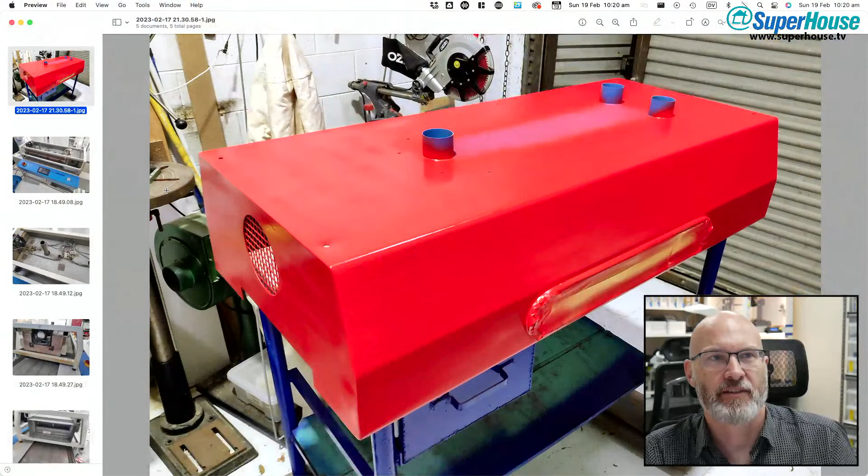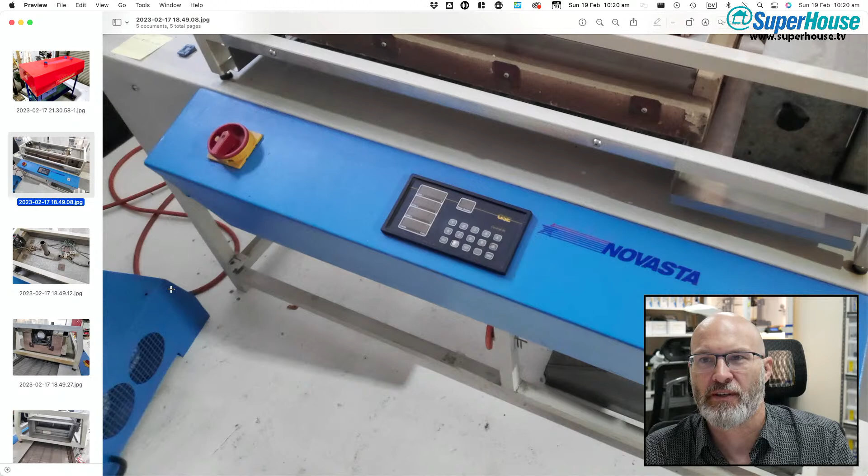So you might remember, if I go to this one, this is the reflow oven, the Novasta, which has its cover removed. The cover that was going over the top of this was the same powder blue sort of color. In fact, you can see it down in the corner, sitting on the floor, the end of the cover. This was after I had removed it, but before I had painted it. So that was the blue cover.

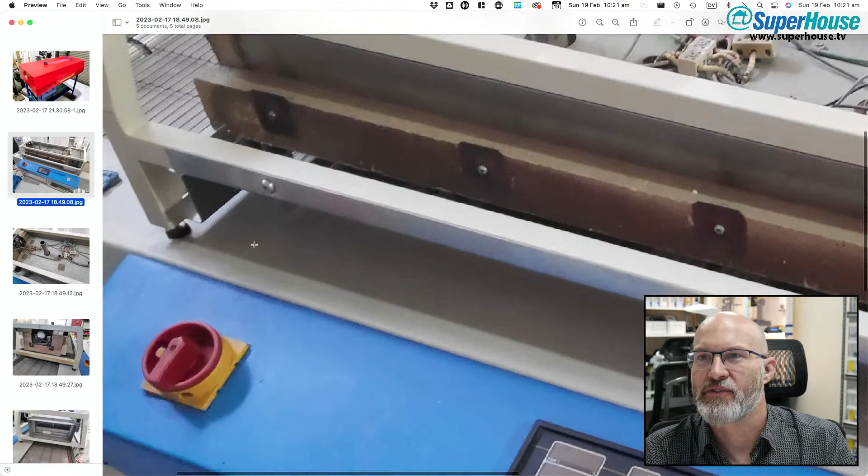Why is my track, I can't pinch to zoom, it's just moving. Oh, lack of focus, maybe that was it. So the cover sits over the top of this frame and then it bolts on with 4 bolts. I unbolted it, lifted it off, and the oven is all still sitting there.

Austin said looks like those fans need some filters. Yeah, there's a fan there that blows into just the chamber above it. This is the chamber above the reflow area, where the wiring and stuff is, so this is not actually part of the heated area. It's just a void above the heated area, with insulation sort of stuff like fire brick all around it. This fan I think is just to keep this chamber above it from getting too hot.

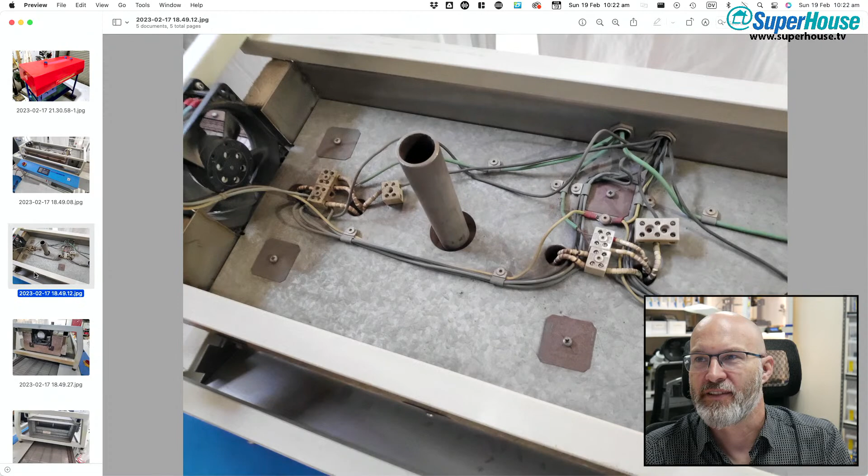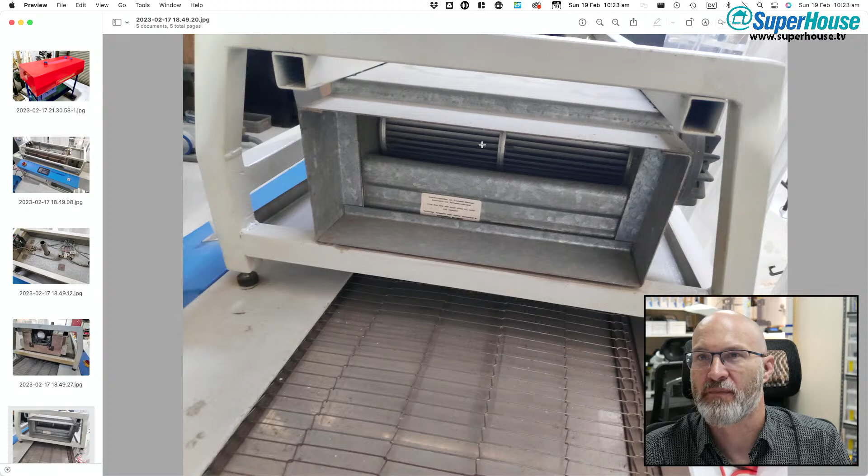Anyway, my point is, oh, and there's just another view down into it, a view from the end. This is the inlet side where PCBs come in underneath, and this is the outlet side where the cooling happens, you can see there's like a drum fan sort of thing there, that's part of the cooling stage.

Anyway, I took the cover off, I painted it red because red seems to be an appropriate color for a reflow oven. I hope you agree. I don't think I've got a photo.

Oh, hang on, maybe I do have a photo of it, an older photo. If I go back in my photos here, maybe there might be, come on, where is it, trying to find a photo of the reflow oven overall. Oh yeah, here we go.

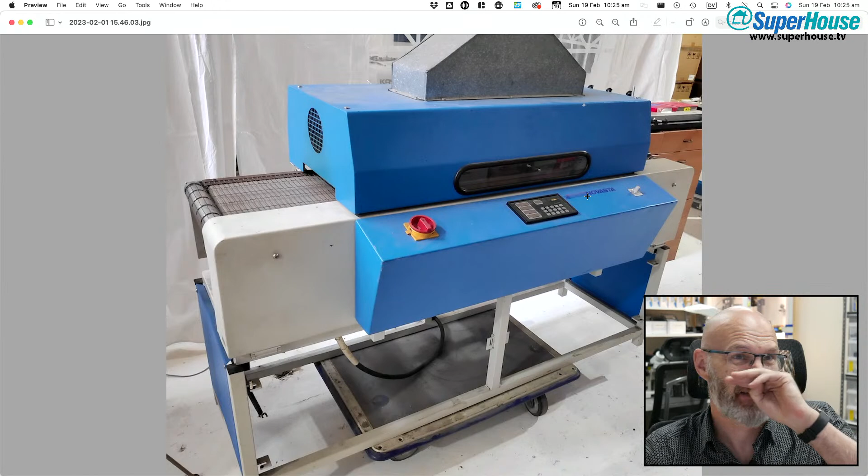So it's got the Novasta logo on it, but Novasta doesn't seem particularly interested. They'd be kind of curious to see it in action, maybe. I've had a couple of emails from them, but they don't really seem to care.

The fact that this is an oven that seems to have been built within the first year of when their company was founded, maybe the second year - so this is one of the first ovens they ever built, and it's now functional again - they don't care. I thought they'd be very interested to see it.

But anyway, my interest in keeping the Novasta brand has disappeared, and I want to put a fun brand on it. Maybe a...

Someone suggested having Steve in the logo, so I thought of maybe Steve holding a cigarette lighter, or Steve holding a match. I was talking to Andy about it last night, and he said if I set up some kind of online monitoring system for it, connected to the internet - not for control, just for monitoring - I could call it the World Wide Webber, which I thought was very funny.

Austin says we have a silkscreen logo, Steve, that would work. Yeah, Steve brand reflow ovens.

So the first thing I thought of was just to call it the Bernie Boy, or maybe Toasty McToastface. I don't know, there's got to be all sorts of joke names.

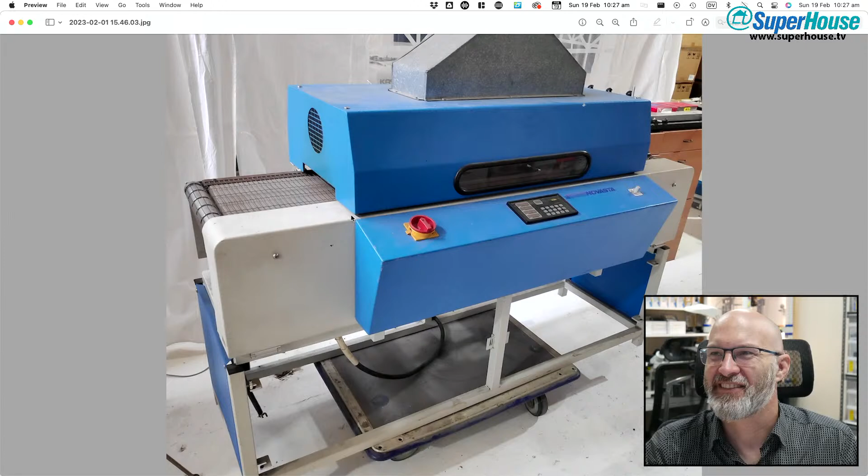Anyway, that's your job - everyone here, contribute. You need to come up with some ideas for what to call this thing.

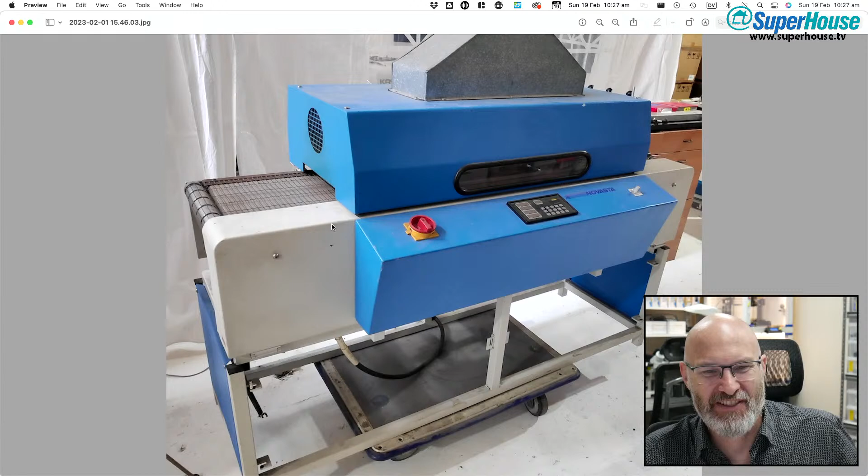Yeah, superstar. Imogen says, oh my god, there are so many good options. Okay, well - oh Michael, I love this one: Gloria Steve Reflow Oven Manufacturing Concern.

That's brilliant. Hang on, I'm going to open Evernote because I think I'm going to be taking some notes along here. Reflow blaster, and Steve with a flamethrower.

Okay, new note. I've just got to copy and paste some of this - reflow blaster, instead of reflow master. Michael says Mr. Sparkle. Yes, Mr. Sparkle.

PCB Barbie, says Aaron. I am copying these in - got to delete that. Delete. Sorry, I'm copying these for future reference.

Can we call it Hot Steve? Super Barbie. What did Gerald say, where was Gerald's comment? Yes, reflow blaster and Steve with a flamethrower - but I liked Michael's one.

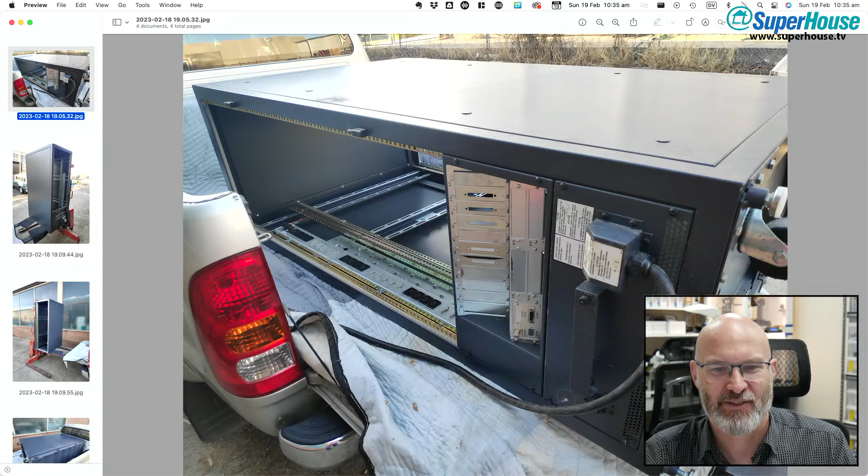Yeah, terrible. Measure twice, burn once. The reflow oven suggestions are still coming in. Thanks, Imogen. I'm adding that one to my list.

Okay, running at 1.5 to catch up. So if I speak really, really quickly, everybody who is running on accelerated to catch up will have trouble following what I'm saying.

So this is a part of computing history. Backing up just a fraction, this is touching on the clean room construction. One of the major considerations I have with constructing a clean room is the overall ceiling height in the factory, since the roof is on a bit of a slope. The high part is on the south side of the building, the low part is on the north side. The roof slopes down, and the clean room is on the north half of my part of the factory, where the roof is slightly lower, about 4.2 meters, give or take. I want to have enough room above the clean room for a mezzanine for storage, which will give me a huge amount of extra space.

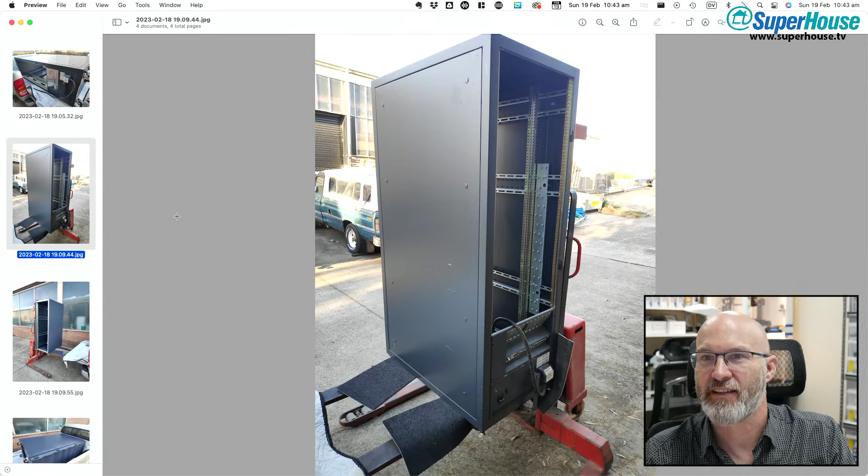So this is, I think, a 36 unit rack. This is it standing upright on the forklift when I was unloading it yesterday. This was before I got it on the forklift—going back in time—this was it sitting on the back of the car. You can see the wavy front on it here; the whole front of the rack is shaped like a wave. It looks really cool, and it is ridiculously heavy. This is probably one of the heaviest racks I've ever seen. The construction—that door alone probably weighs nearly as much as some racks on their own. A lightweight rack wouldn't weigh much more than this door. It is super heavy, and you can feel it—this is on the back of a Hilux—you can feel it driving down the road. There is a lot of weight in that.

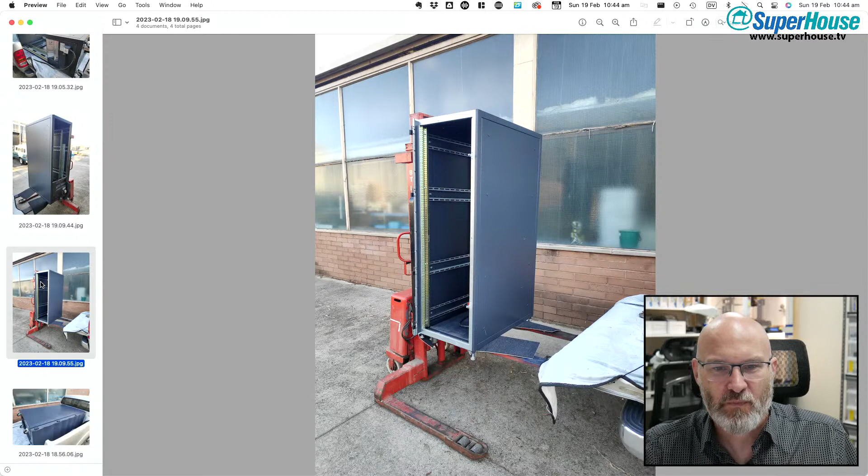Gerald said, yeah, that's right. Emily Velasco has stickers that say 'Big Wet Meat Sack' to stick on the electrical panel. Yeah, I should get some of Emily's stickers—I'm adding a note to myself. Thanks, Gerald, for reminding me. I'll see what else Emily has available too.

Right now, this rack was previously part of—yes, Stephen, that's another good one: 'This machine will kill you and it will hurt the entire time you are dying.' Yeah, I love those funny safety signs. Back to the story. Stop waving shiny things in front of me, my squirrel brain will chase them.

This rack was originally part of a Cray supercomputer used at the Department of Defense. Andy told me the serial number on it—Cray number 105, I think he said. I'll have to find out which model of Cray it was, get some details from him, and maybe make a little historical note to stick on it. So in any case, this chassis was originally part of a Department of Defense Cray supercomputer—it's a piece of computing history, really cool to have. Yes, someone says it's a museum piece. It is.

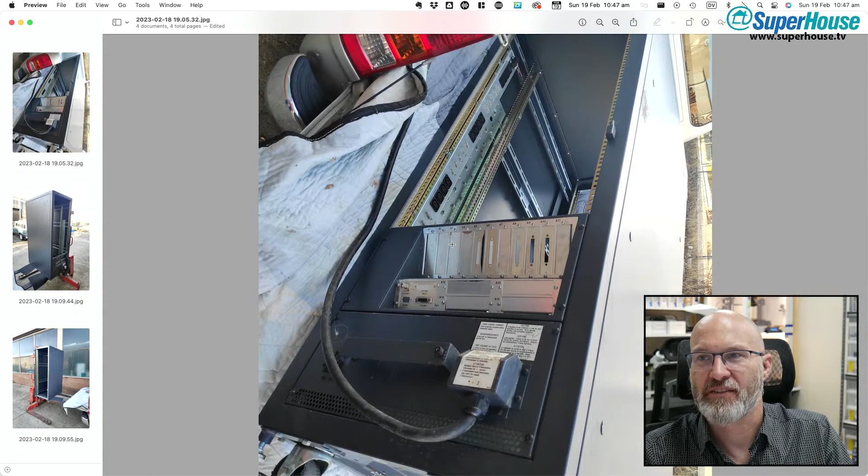So in the bottom of the rack, in fact if we have a look at this photo, you can see there it's got — these are earthing tie-down points, I think, on the right, this big bar that goes up here. So power into the back of the rack here, and then all of the power management and interface stuff here. And then the rack would have been filled with whatever it is that makes a Cray supercomputer.

Potentially serial sockets connected to relays to turn individual sockets on and off, Michael said.

Potentially, yeah. I got this here last night and unloaded it, so it's currently sitting in the back of the factory. It's on huge casters, so it's really easy to move around, got really big wheels on the bottom. In fact you can see them in this view here. Very, very heavy duty, and then adjustable feet, obviously, to lift it off the wheels and sit it properly in place on the floor.

So, but I haven't investigated at all, so I don't know how any of this is connected, or where this power cable goes, or what's inside here. There was a 5 volt 30 amp voltage regulator board that Andy had, but that may or may not have come out of this.

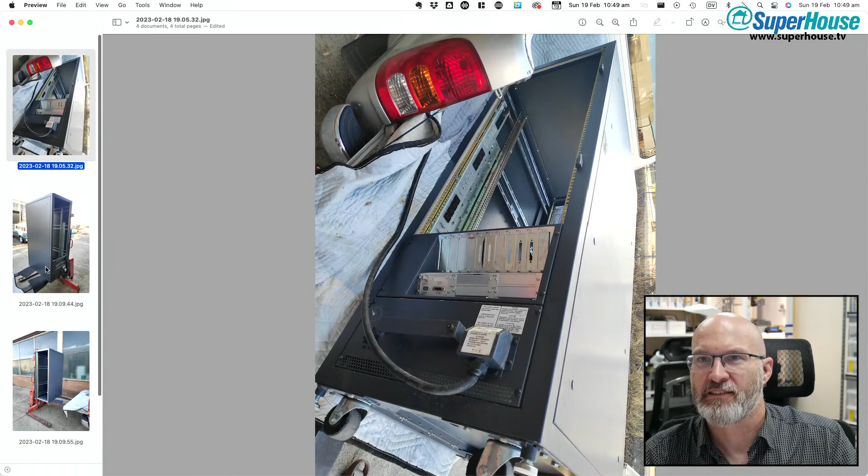So that is the story of the Cray supercomputer rack, which is going to go into the clean room in the location of the current rack. And what this will allow, because this is significantly shorter than the current rack, is it will give me total flexibility in setting the ceiling height wherever I want it.

Scott says, pretty sure cable tie is a thing for bicycle wheels, yeah. Is cable tie here? I think cable tie is probably out on his bike right now. He's probably up on Mount Dandenong, is my guess, because it is a beautiful day here in Melbourne, and it doesn't seem to matter what the weather is — cable tie likes being out on his bike, going for a punt up the hill and then a rocket ship descent back down again.

Now, what was I getting to? Oh yes, okay, next thing I'm going to try launching.

Michael said, just about all server racks on Navy ships everywhere in the world are made by a little company up near Buffalo, New York. You're not allowed to use anything else.

Interesting. What am I doing? That's right, launching Fusion 360. So that'll take a while — I press the button, but Fusion, it takes so long to load.

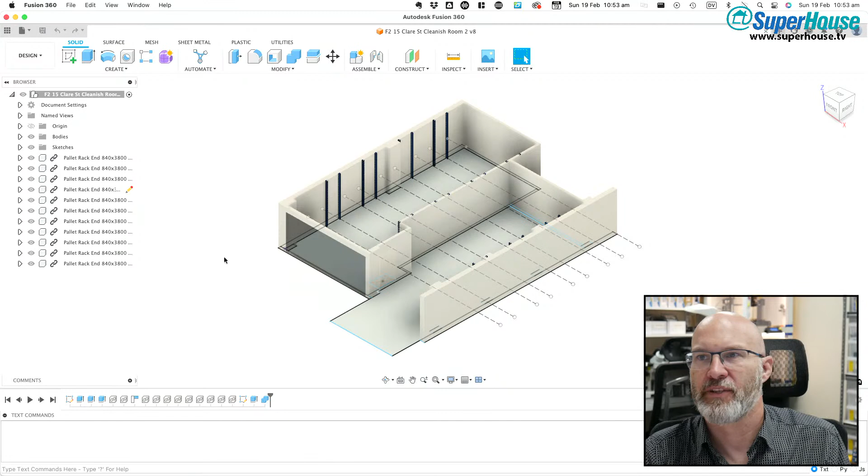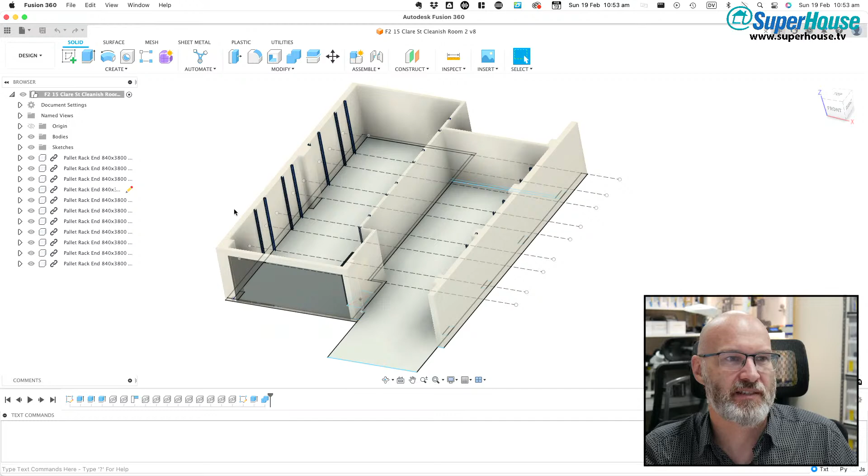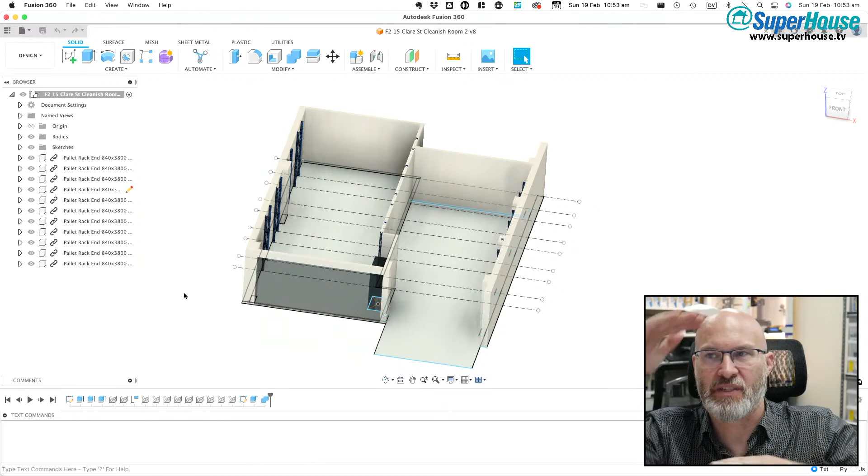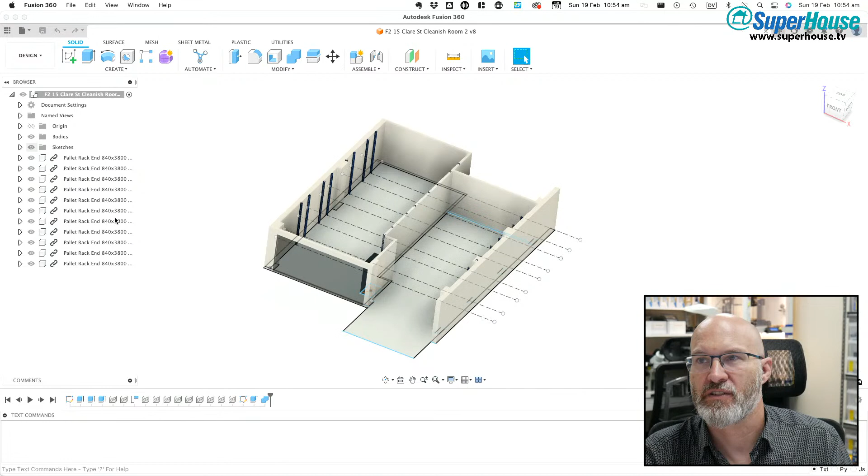Very quick reiteration: build simple walls, etc., which is a reasonably straightforward way of doing it. The main issue is the cost of the beams required to get the span across the clean room, because the clean room is quite wide - about 5.2 meters from the wall to the division down the middle, or about 5.1, something like that. Running joists across here, like LVL beams or whatever, the depth of the beams is significant, the number of beams you need is significant, and then the cost becomes significant. So doing it as regular timber walls with LVL beams across it in order to have a mezzanine above it becomes quite expensive. Hang on, I'm just going to turn off sketches and I'll give you some explanation of what you're looking at in just a moment.

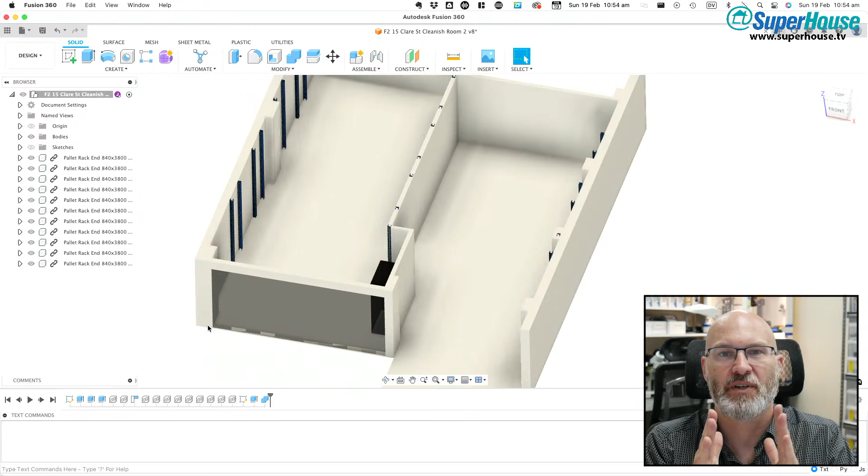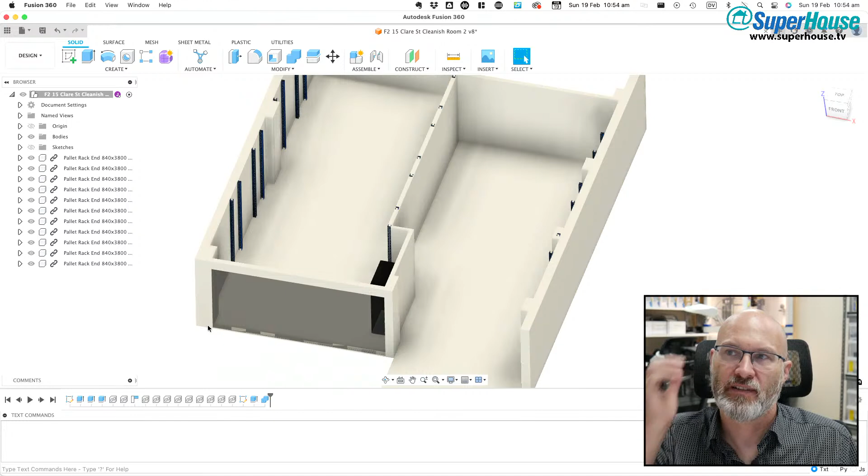So then, of course, I was talking about using cool room panels, and that is an interesting option, but there are some issues. One is insurance. These days, cool room panels, which are foam sandwich with Colorbond steel on both faces, are becoming an insurance problem because they can be a fire hazard, which means you need special fire retardant cool room panels, and they cost significantly more. And then the issue, once again, is the span. Using cool room panels as a combination of structural material and final finish has some issues, and it also ends up being reasonably expensive by the time I do a thing this big.

Mr. Fixit says use metal studs, easy to run cable. Yep.

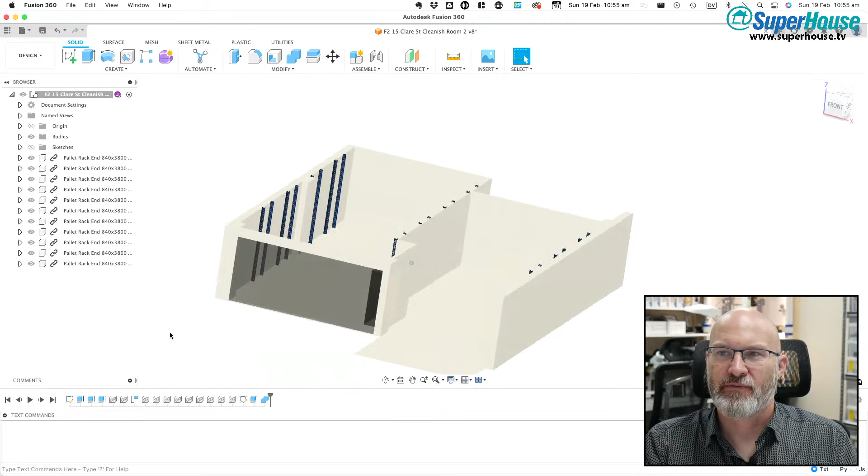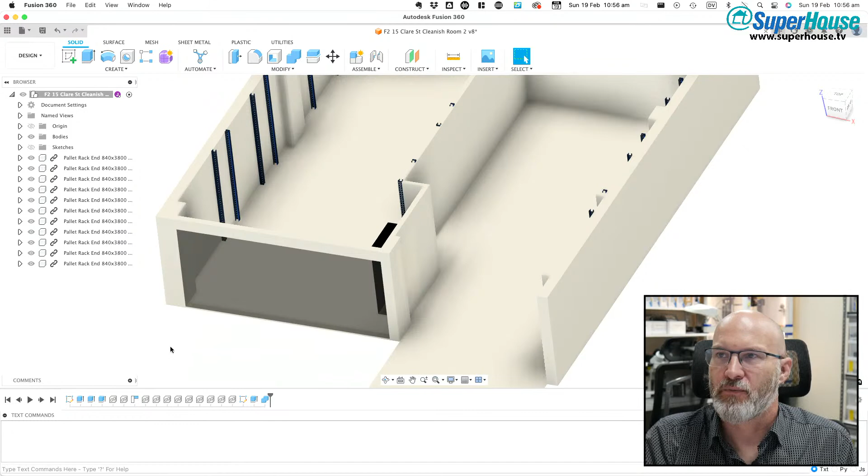So, sorry, I was just skipping back through chat. All right, I will try to stay focused. Anyway, in recent times, Lachlan has fallen in love with Dexion pallet racking, and a couple of weeks ago, Ben, one of the guys from Melbourne Eastern Suburbs Hackers, was clearing out his factory just down the road in Boronia, getting rid of a heap of Dexion pallet racking. Lachlan and I went down to have a look at it, negotiated a purchase on the spot, and Lachlan just bought the whole thing. What Ben was getting rid of was pallet racking and a mezzanine, so Lachlan is using that material to build a mezzanine out in the back part of the factory, in his area. It really got us talking about using Dexion pallet racking as a structural material to build the basic structure and then simply clad it. So what this model is about is using pallet racking.

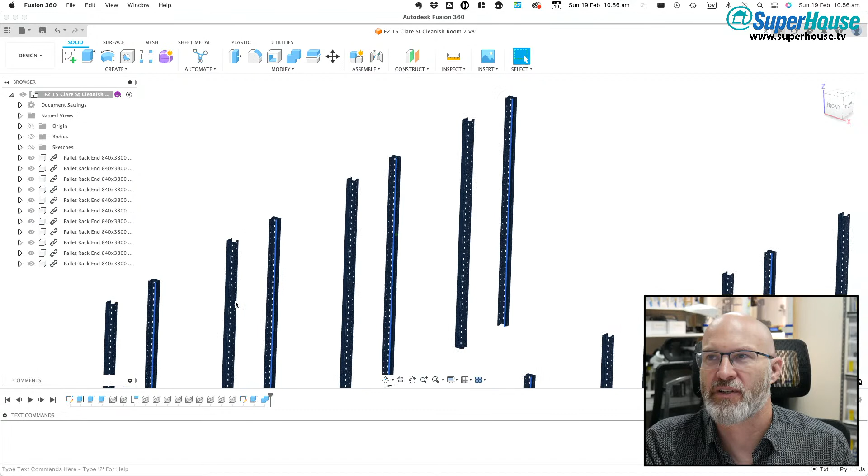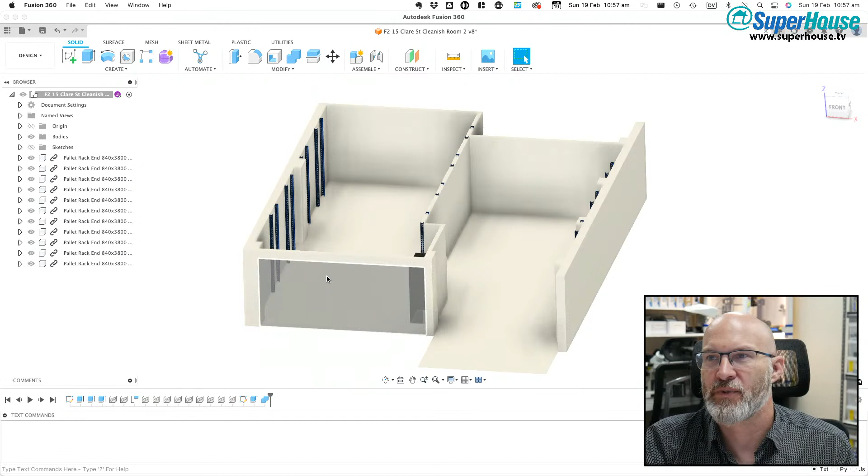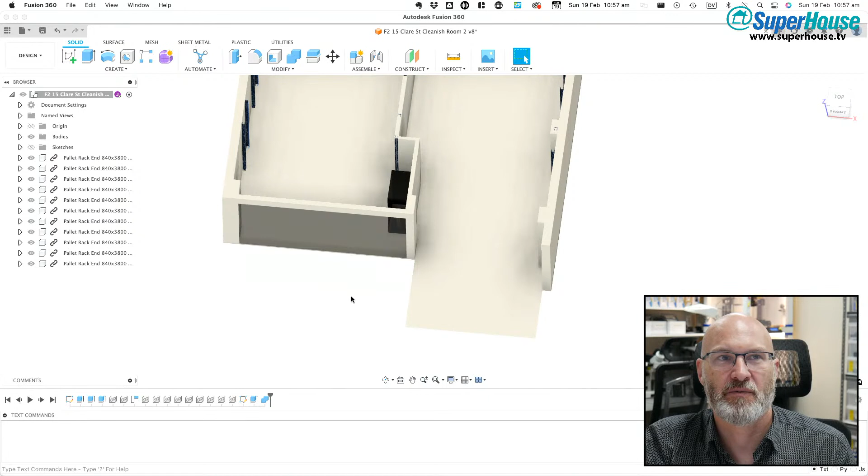Now if I turn off that one - yes. So what you can see here, this is a very poor model, just to show basically where it goes. Each pair of these is a set of uprights, and then there would be beams across as well. The beams aren't in this particular model, but if I turn back on the main area - this area at the front here is the big glass wall, just to my left, where all the big glass sliding doors are. In there you can see the location of the server rack. Part of this thicker stub here is the existing cement block wall - the wall actually comes forward from there as well, but I haven't included that in the model. This white area where I'm spinning the cursor around is my front lab area, where I'm sitting right now, and this area here is the loading dock, where I've got workbenches and things.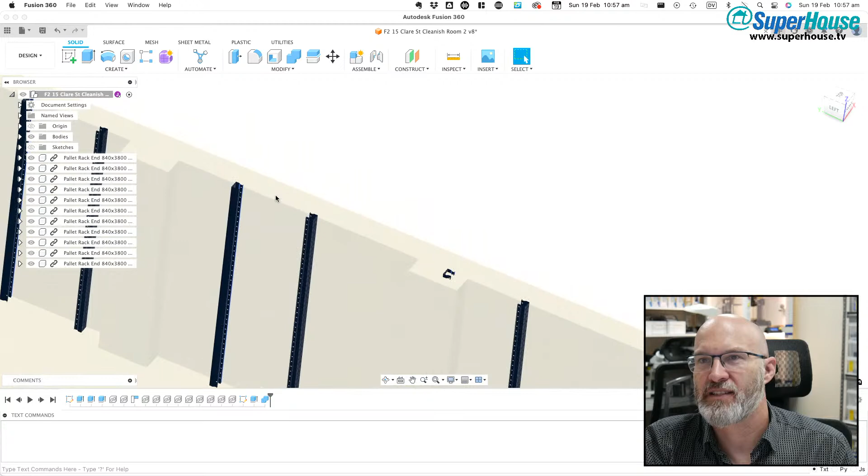I haven't bothered with the model because that's not the point of this. I was just doing this to figure out where I could put things. The major issue is these buttresses in the wall of the factory. It's a cement block wall, but periodically it has these buttresses sticking out, and I was trying to work out where I could fit the uprights.

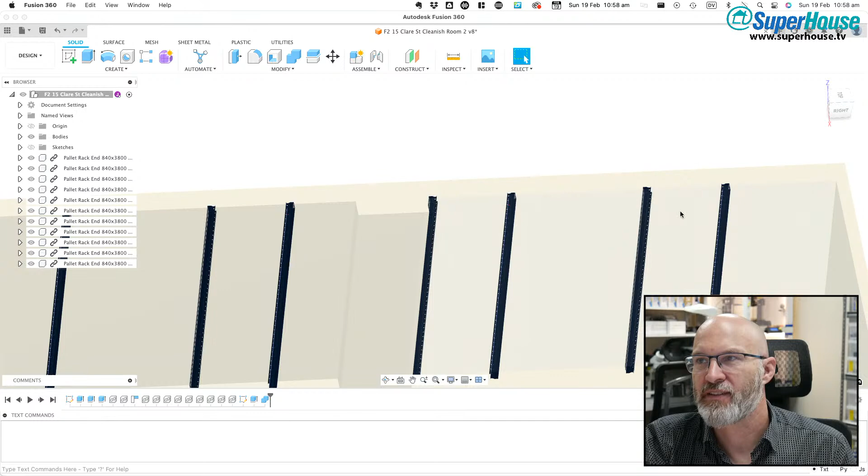For the pallet racking that would clear the buttresses and keep all the spacing as it needed to be. So this is the current plan. Use these pallet racking uprights, which will actually go up to here somewhere. They don't stop at this point. This is just, once again, for positioning purposes.

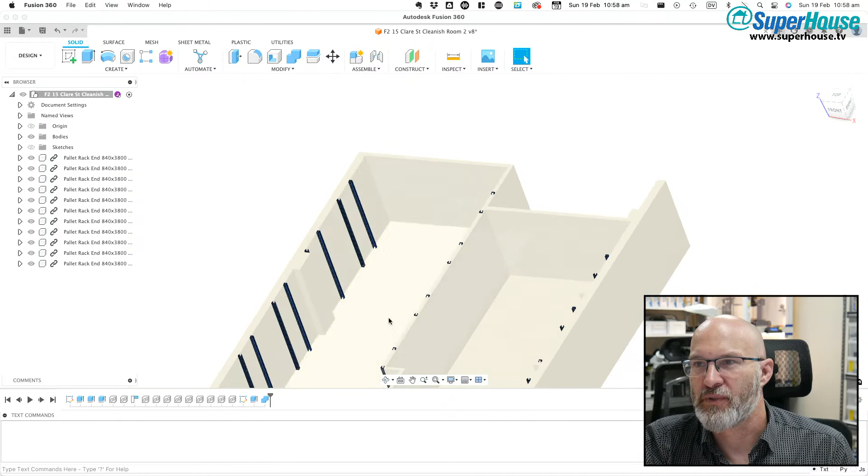They will go all the way up to here somewhere. I know this probably looks weird because I've got the camera in orthographic view. Let's go for perspective view. Now it'll look a little bit more realistic and probably stop messing with your mind as much.

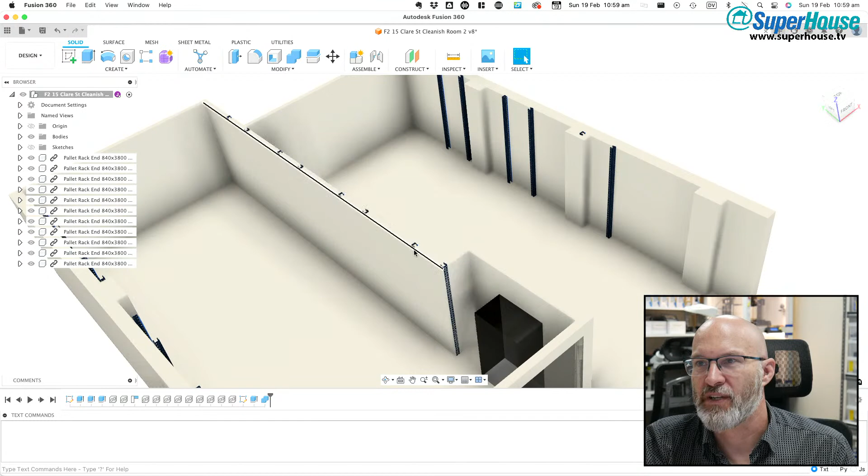Now you can see here in the middle of the room, just poking up at the top there, is the top of pairs of the uprights of the pallet racking. So the idea is that this would be built by assembling the structure, and then I've got 4.2 meter beams.

to go across here. So the beams haven't arrived yet, but I've bought them. They're being shipped from Sydney, and they're basically the longest beams you can possibly get that are Dexian compatible without going into totally ridiculous custom made stuff. So they're not exactly 4.2 meters—they're like 4,217 millimeters or something in length.

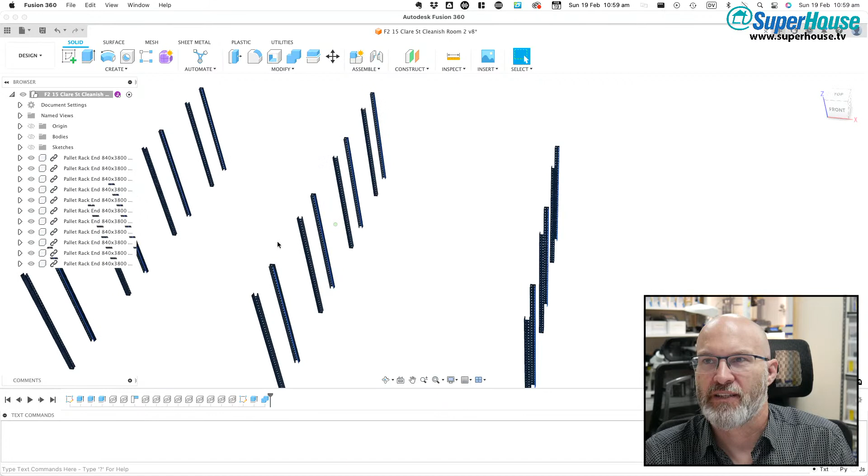So there would be Dexian beams going across here. The plan is to build the skeleton out of the Dexian pallet racking, and then line it with plasterboard so that from the inside it'll just look like a regular plaster wall. It'll be a nice smooth wall, and the same on this side as well—the whole thing will be plasterboard lined.

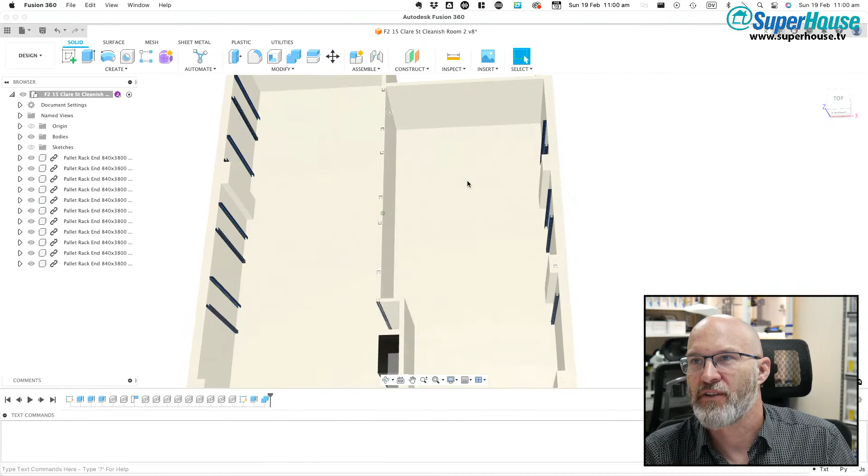Now you'll also notice this area at the back where this thing comes up here. At the moment, the back of my area is represented by this wall. My packing bench is down here, and all my storage shelves and things are along here. The reflow oven is currently sitting right about here, and the pick and place machines are in here.

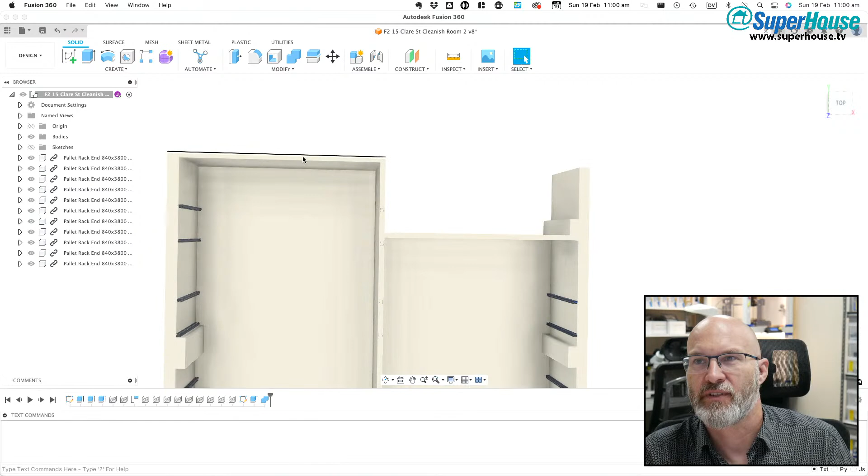But I've been discussing with Lachlan taking some more space at the back of the factory. So the current plan is that my clean-ish room, which currently ends about here, is going to push back another couple of meters into his area, and then he's going to have a pallet rack on this side. So this dividing wall is going to be on the back of a pallet rack that he will have—just a divider between the two areas.

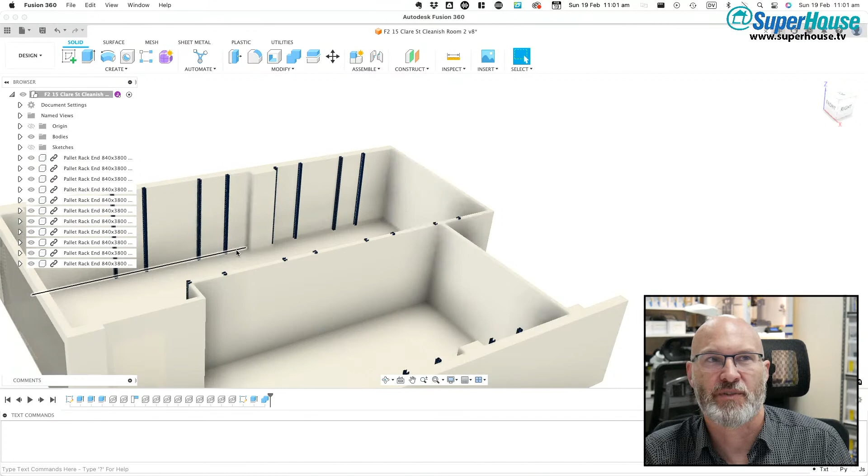And then there'll be beams across, say from here across to here—lots of beams running across, forming the ceiling of the clean room. And then there'll be purlins that run across the tops of those, running lengthwise, and floor sheeting on top of that, forming the structure.

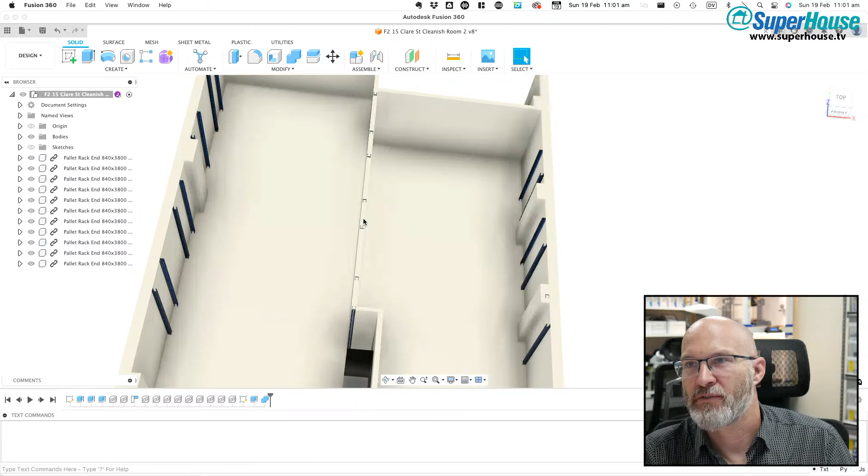The interesting thing is that with the 4.2 meter beams, you can see these uprights are against the wall and inset within the buttresses. Then we have a row of pallet racking uprights in the dead center of the factory, and another row against this wall in between the buttresses. With the 4.2 meter beams, that span fits perfectly.

So what this means is I'm actually going to end up with a mezzanine area on the right hand side as well, so I'm going to gain a huge amount of floor space. Yeah, a little bit hard to represent like this.

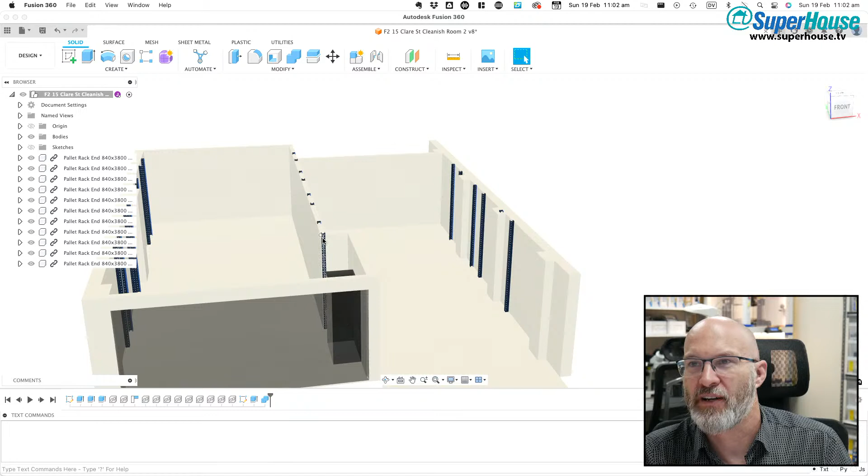You can see that I'm doglegging the wall around the server rack, so the server rack will be visible through the glass wall, but then the wall will scooch around behind it and head straight down here. That dividing wall will be in the exact center of the factory, instead of being offset, which was my original plan.

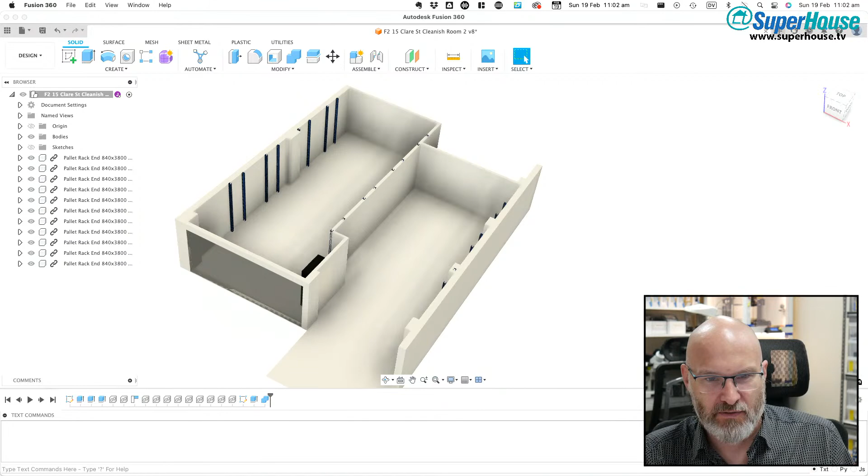Use metal studs, it's easier on cable. Andrew says he uses Dexion and it's awesome. Yes, and Michael says Dexion stuff is definitely A+.

Stephen says leave the start open where the big roller door is, so you can forklift things up to the mezzanine by opening the door. Scott says be very careful and do the calculations of load bearing ability in the middle of the mezzanine floor. Yes, that is important. The Dexion beams come with load ratings, which is very helpful, but because this is a large span, you're right, it's the middle part of the span that will be under the most stress, so I need to be careful about all the load ratings.

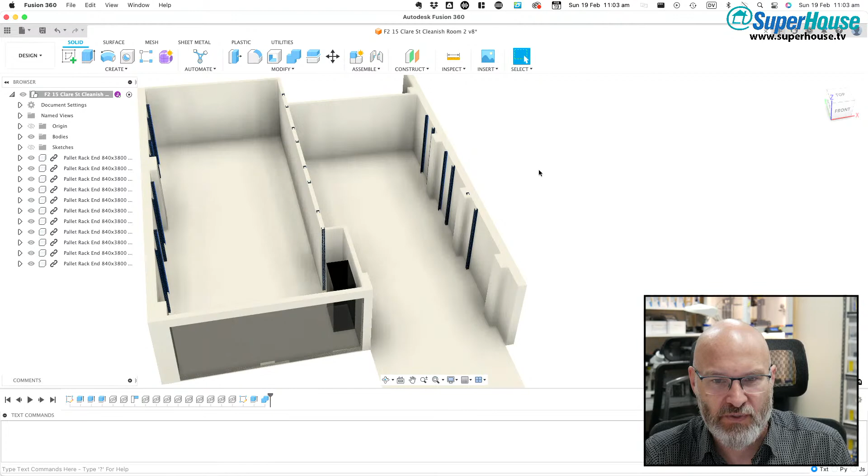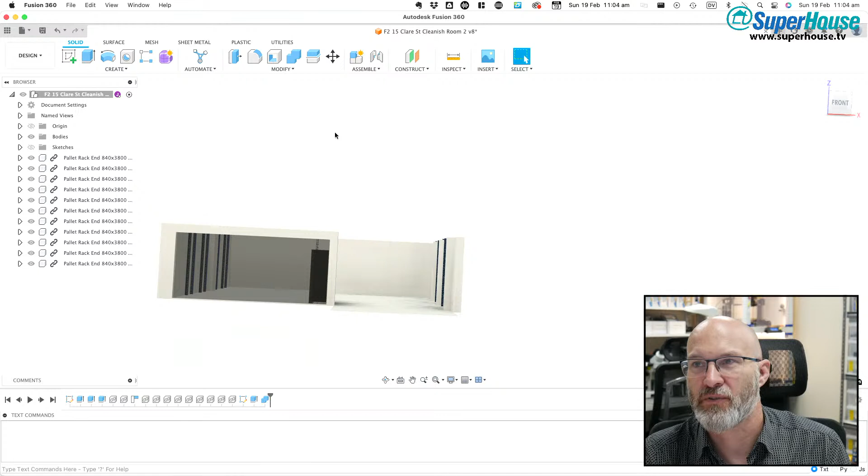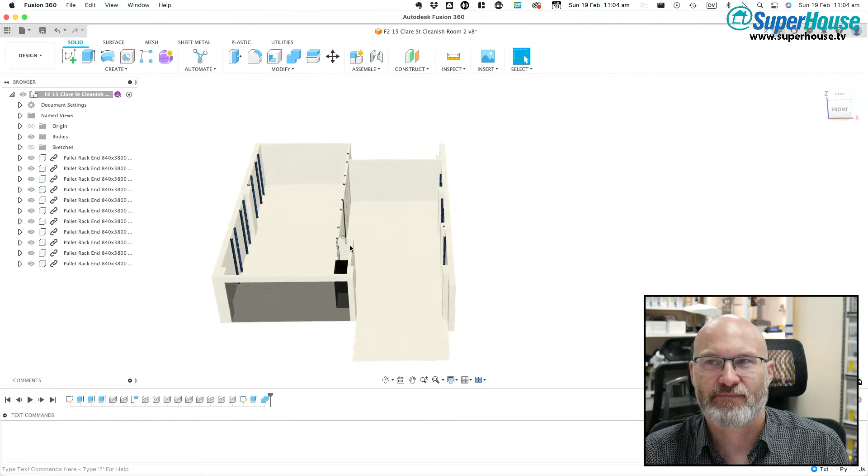Stephen W said yes about forklifting things up to the mezzanine. So this is where the big roller door is, and it'll be full height - the roller door actually comes up really high at the front. The front roller door is enormous. The mezzanine comes across from this point, and being able to forklift stuff up into it or winch it up would be very useful, because the ceiling goes right up to there. One thing I thought would be cool would be to get an electric winch, like from a four-wheel drive, and mount that on a track up on the ceiling, up on the high roof, 4.2 meters or whatever, and be able to put slings around stuff, press the button, and hoist it up onto the mezzanine area.

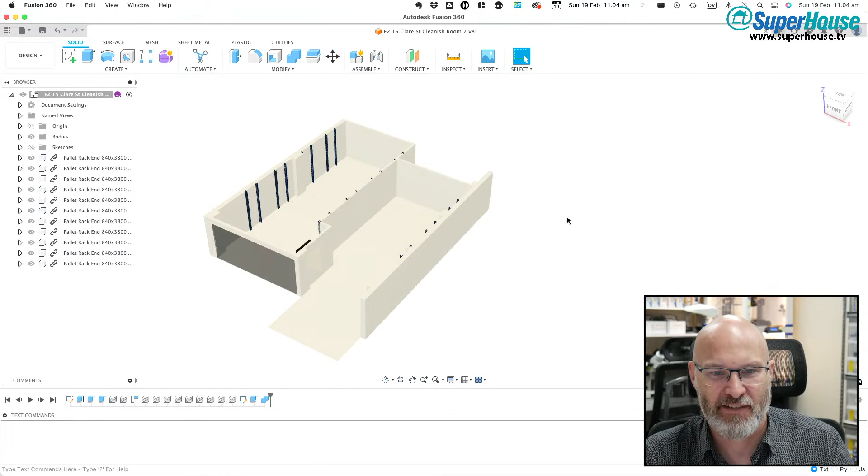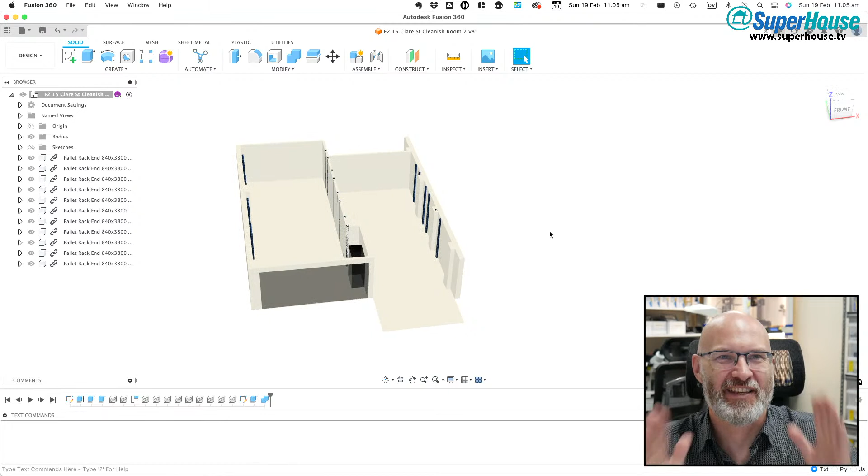Scott says I've seen in person what happens when you overload pallet racking unevenly - you don't want those walls trying to become friends with each other. No, they need to be kept apart. Keep them separated, yeah.

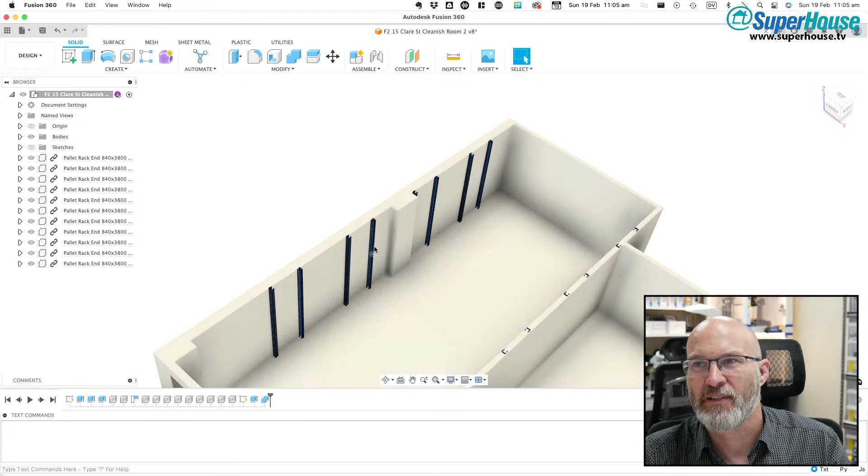Luckily there are some attachment points, so with pallet racking it needs to be bolted into the floor, but it can also be bolted into the walls. I can put brackets on the walls and do all that sort of thing as well. A chain hoist would do it, Max said. Yep. Chip said a big wall hug. Yeah, the wall's going hello. Got to keep them apart.

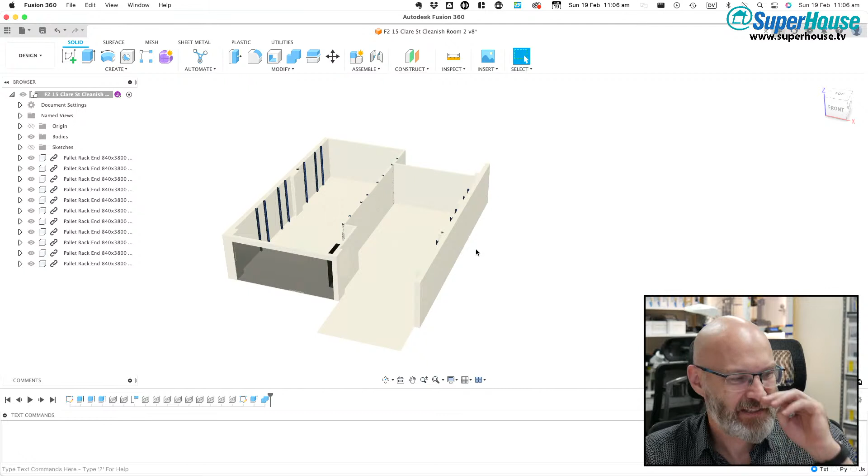So the upshot of all of that is that there's a Dexion dealer, a place that buys and sells second-hand and new pallet racking, over our back fence. So getting access to Dexion stuff is really super easy. It's not fun to carry, but with a couple of people we could literally pick stuff up and just walk it around the corner rather than needing a truck to deliver it.

Max said four-wheel drive and boat trailer winches are not okay for lifting. Yeah, that's true. There are electric hoists though that are designed for that purpose.

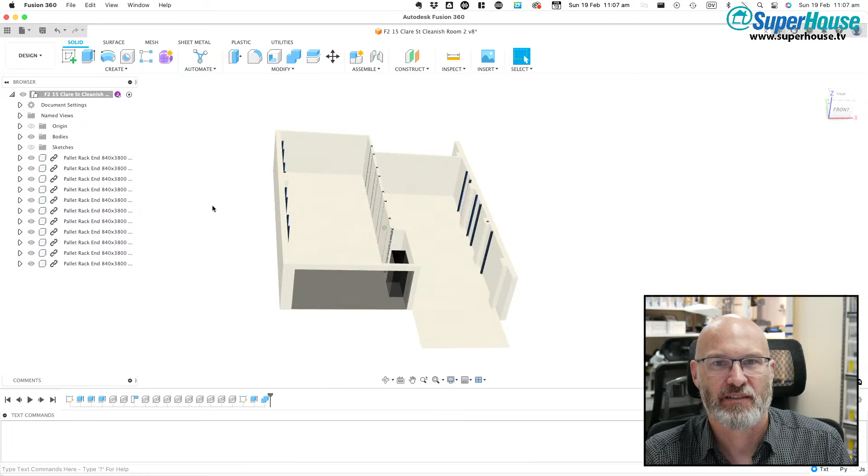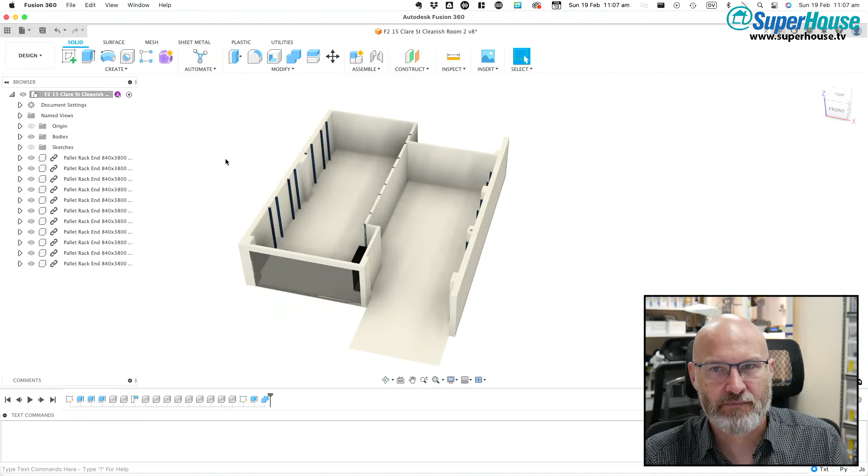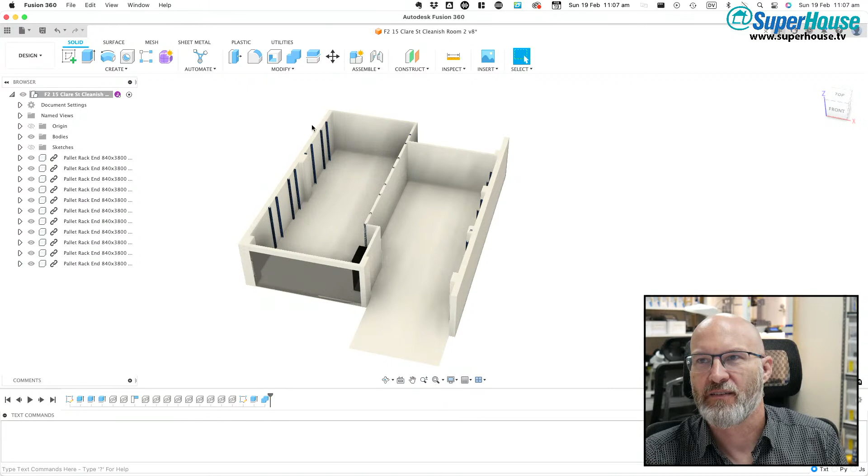So the beams are on order, they should be arriving on a truck later this coming week. We already have some of the uprights - I think we've got 5 of the ones we need, and I need to get a few more from the Dexion dealer just around the back. The long beams, the 4.2s, the dealer over the back fence could get them, but not for another 2 months or so - there was a bit of a lead time. I found a place in Sydney that had them in stock and could ship them for a reasonable price, so I ordered them from Sydney. The long beams are coming from Sydney, and the uprights, which are just common off the shelf standard 840mm deep pallet racking uprights, you can get everywhere - they're in like every second factory in Bayswater. I'm just getting them locally because they're the easy thing.

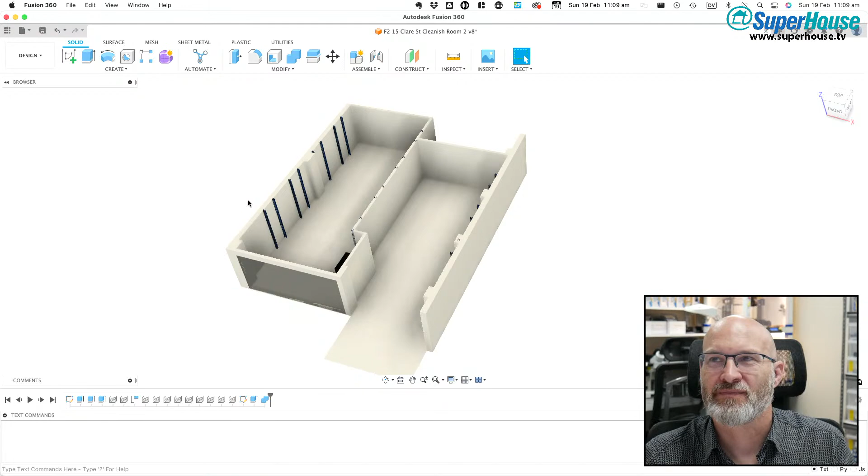Where's my list of things? All right, lab construction, talked about that. Oven, talked about that. And if people have more ideas for a name, I really like it - for the company name I'm going to use Michael's suggestion of Glorious Steve Reflow Oven Manufacturing Concern. But then I need a name for the model of the oven, which could be Bernie Boy or something else. Let's quit out of... no, I don't want to save. I'll quit out of Fusion.

So friends, what else are we talking about today? Firemaster 5000, Stephen says. Yeah. I am going to go to the fridge and get myself a drink because I can feel that I'm going to need one.

I stuck this drink in the freezer portion earlier before the stream started. I don't think it's got any ice in it yet, but... oh yes, it does. It's got a big chunk of ice in it, which is great. The colder the drink, the better.

Pepperoni pizza reflow oven.

Okay, I do need to have some of this. Muting now. That's better.

I saw this last night, I've got to show this. I named my toilet Jim instead of John. Everyone is so impressed when I tell them I go to the gym every morning. Silly things amuse me.

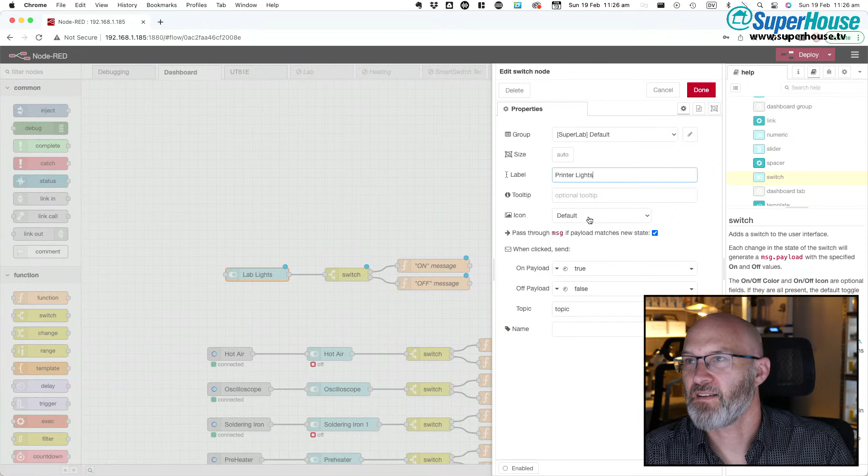So we've got printer 1 lights. What I should do is, I want it to be activated. What shall I do here? On message, off message, lab lights. All right, this is going to be a really nasty, crude thing, but I'm going to copy this and stick it down here. This is just going to be a way of temporarily overriding lab lights, and I'm going to make that a new thing. Super lab default in the group, that'll do, and I'm going to call it printer lights.

And yeah, I don't care about any of the rest of that. I don't want voice control for it. I'll take that down to here. What have I got? It's just a switch. Oh, that's just for converting the payload. Now if I do a deploy, let's see.

Now, if I go to that and UI, I was going to do it on my phone, but then you can't see what's going on. So if I go to UI, will it get it? Okay, lab lights, printer lights, can I turn them on? Hey, it worked, how about that?

So I now have independent control. Turn the printer light off, printer light on. Okay, so I now have independent control of the printer light. But if I use my voice assistant to turn the printer lights on and off, they will follow whatever the room does, but then I can override it. So that's kind of an acceptable thing.

Oh, Scott says you're not running the latest version of Node-RED yet, or just not using the newest features. I'm definitely not using the newest features. That's a good question, what version of Node-RED am I running? This is running out of Docker on the Synology NAS. So where are we? How do I even find out what version of Node-RED it is? 302, v302, I think that's pretty recent.

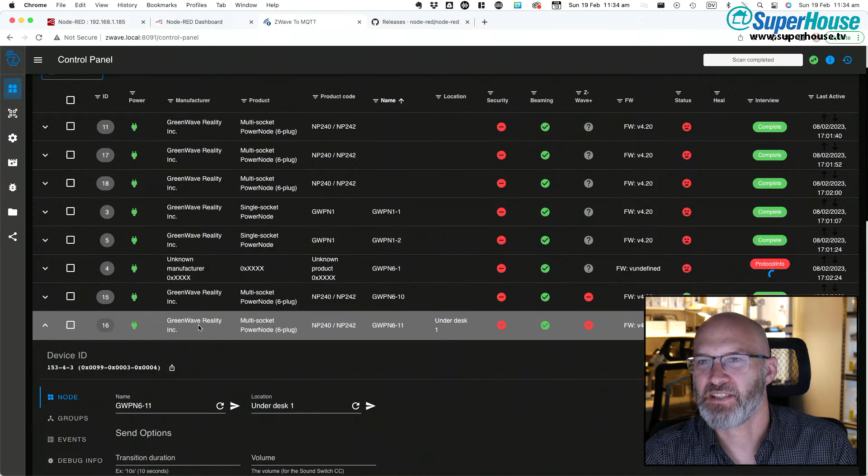So, for example, Greenwave Reality, this one. And I've got, this is a 6-way power board. It's the way I've named these: GWPN6 is Greenwave Power Node 6, which is a 6-way power board, and it is number 11. And then I've put a location of under desk 1, and then there's a whole lot, and then it's got all of the outputs.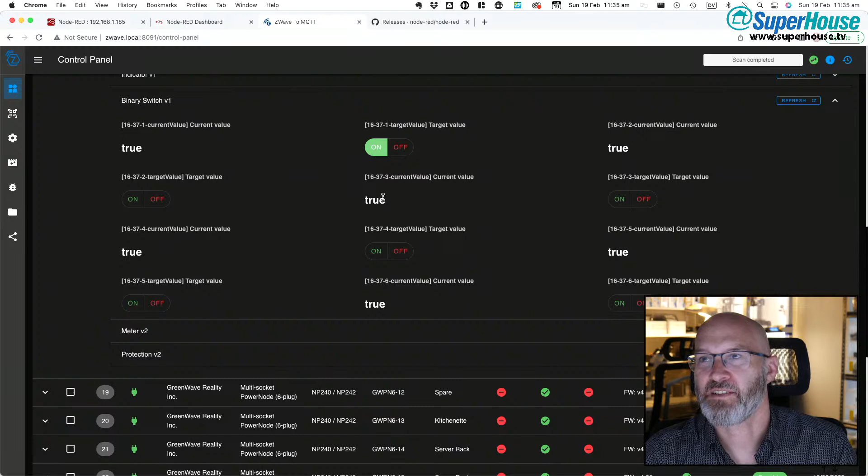So binary switch, this is the state of the outputs in the power board, and how much current - oh no, it's current value. So target value, current value, binary switch, and they're all power monitored.

So if I go into meter, you can see, for example, there is 20.1 watts being used on the first output of that power board, and there is 77 watts being used on the final output of that power board, and nothing on the others. So I've got power monitoring and control of every single outlet.

And then I've got these mounted under the workbenches all the way around. And this is how I'm doing things like voice control of every individual device, like the soldering iron, the hot air, the preheater, the oscilloscope, bench power supplies. They're all plugged into different outlets in these Z-Wave power boards, and all controllable and all monitorable.

Oh, Mike V said, what is this? Not familiar with this. Yeah, so this is something that I am going to do a video about because it definitely warrants it.

So this thing that we're actually looking at here, Z-Wave to MQTT. It is a bridge. What it does is bridge between Z-Wave devices or a Z-Wave network. And Z-Wave is mesh based, which means that if you have a whole lot of Z-Wave devices, they pass signals between each other, and so you can have devices down through a very big building. You don't necessarily need a connection all the way to the far devices. As long as the message can pass along the chain, it'll get there.

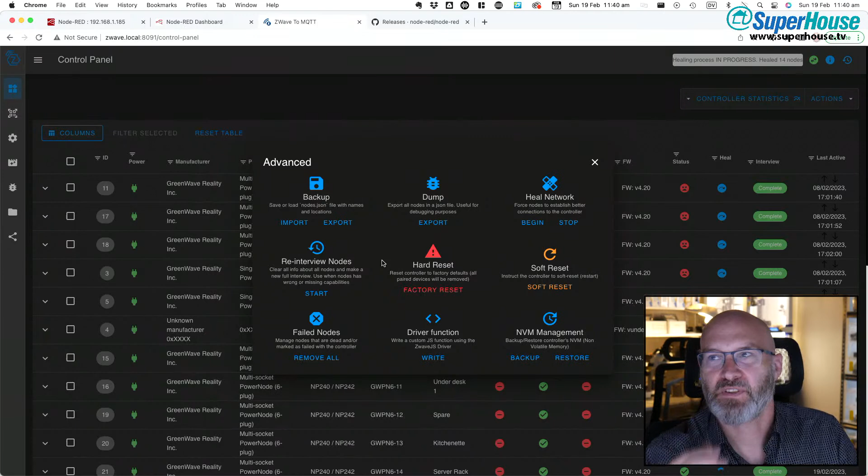So, the reason for that heal network thing - what this is doing is re-establishing, you can see the status here, it's doing heal. Some of these are done. Some of them down here are done. These ones are in the process of being done. These ones say skipped, I don't know why it says skipped, but anyway.

So imagine you have your main access node, like your Raspberry Pi with the Z-Wave adapter plugged into it, which is what I've got, at the front of the building. And then you install a Z-Wave device all the way down the back end of the building. And it works, but your connection is not particularly strong. Those two devices will be bound to each other, and the device at the back of the building will preferentially communicate directly to your node at the front of the building. So it's pushing the limit of what it can do.

Now imagine sometime down the track you install a second Z-Wave device and you put it in the middle of the building. It will also bind to the device at the front of the building. But you've now got these two devices on your network that are both connecting directly to your primary node.

And that's not optimal. So what the healing process does is it tells all of the devices to re-examine the strength of all of the other devices around them and establish a new routing setup, a new priority on routing. So in that particular case, the device that's right down the back of the building, once you tell it to do the network heal, it might say, oh look, there is a new device that is closer to me and it has a nice strong signal - it's the one in the middle of the building. So I'm now going to route my signals through that instead of trying to reach all the way to the front of the building and talk directly to the end node. So what the heal does is optimize all of those connections through the mesh and allow it to run more efficiently.

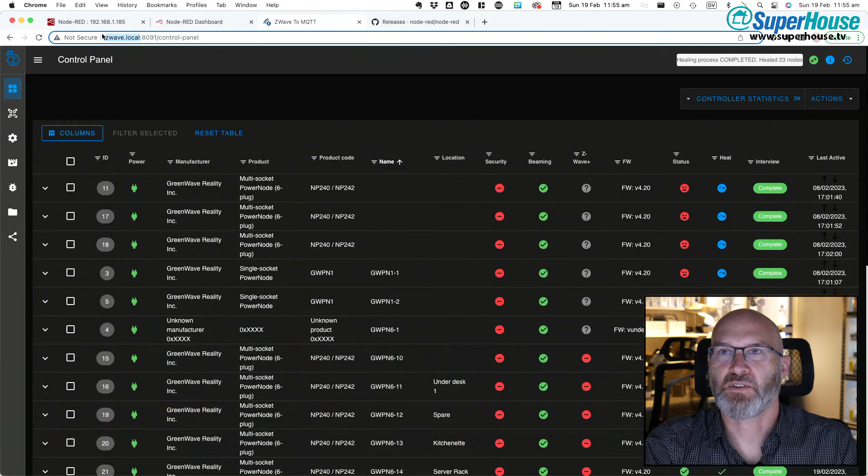Imogen Ann asked about running the Z-Wave setup on a normal PC, and Scott said it's just running on Linux. Now, you can do it in Docker. This is stretching my memory, since it's been a while since I set this up. I'm pretty sure that this zwave.local machine, which is a Raspberry Pi, I'm just running this in Docker on the Raspberry Pi. So as long as you can pass the USB device through to the container, it should be fine.

Oh, it's 11:55. It is 5 minutes to pizza time.

So what have I missed about the new Node-RED? Yes, so there were the links, HTTP request, maintenance release, milestone release. This is where all the interesting stuff is going to happen. Focus editor for undo. Let's have a quick look. What can I do in Node-RED that I could not do before? Where are all the cool tools that people have been using? So let's try what's in here.

Can I do flow, subflows, create subflow, groups, group selection, ungroup selection? Maybe that's how I do interesting things. Let's just try grouping something. I'm going to select these and then go groups, group selection, and it's now put a border around it. Okay, and now what? Oh, okay, so attributes.

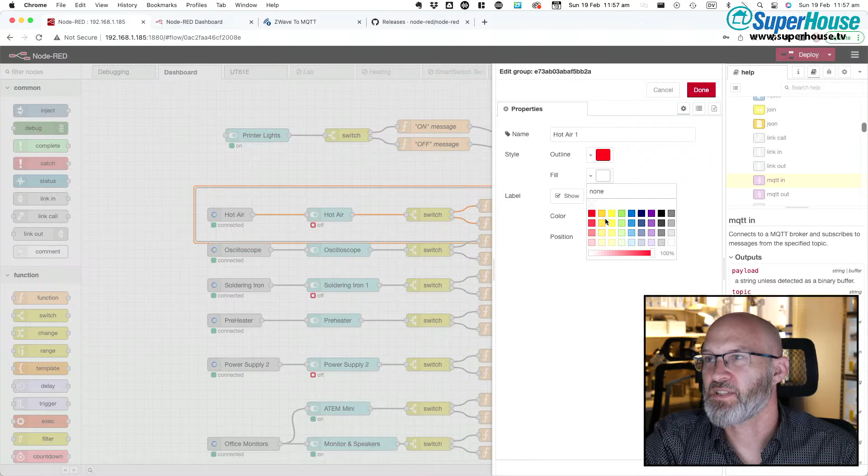So I can give this, I'm just going to call it hot air 1, because there is now a hot air system for Tom's bench behind me, so we're going to have to start numbering everything. I'm going to make it red just for the fun of it. Label, show, color, yeah, that'll do. Top left, fill. Just so I can experiment with this, I'm going to give it a yellow fill.

All right, so now I have a group, and if I grab it, now I can drag it around as a group. Yeah, that's kind of interesting. So now I can make blocks and move them as blocks. And now what happens if I move something within the block? I can't. I wonder if there is a way, or like a hotkey, where I can move an object inside the group.

Control delete is the most awesome new feature, says Scott. I'm afraid to do that. Control delete sounds like something that would do damage. Am I going to wreck my setup by doing control delete? I don't know. All right, I'm going to try it.

With nothing selected, I'm going to do control delete. Nothing happened. What about control backspace? Nope, nothing happened. Because this is a Mac, maybe it needs to be command delete. Nope. Command backspace. Nope. Alt. Nope. Okay, control delete. Michael says that sounds like press Alt F4 for better application performance.

So what I want to figure out is whether it's possible to move things within a function block. I can now grab a block and move it, but if I grab any of the items within the block, it moves the entire block. Do I have to ungroup it? Ungroup selection, and then I can move things, and then I can regroup it. Group selection, if I just do that. No, I don't want to do that.

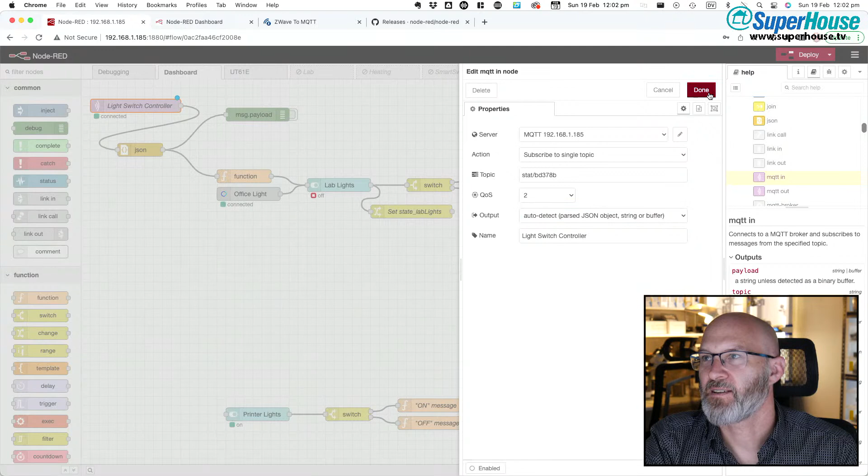So I'm going to do that, and then I will control, so I no longer need the conversion. If I now control-delete that, you can see that node has gone away, and now it is linked directly into these other nodes, and it left those links intact. It re-established the links that would have previously passed through that node.

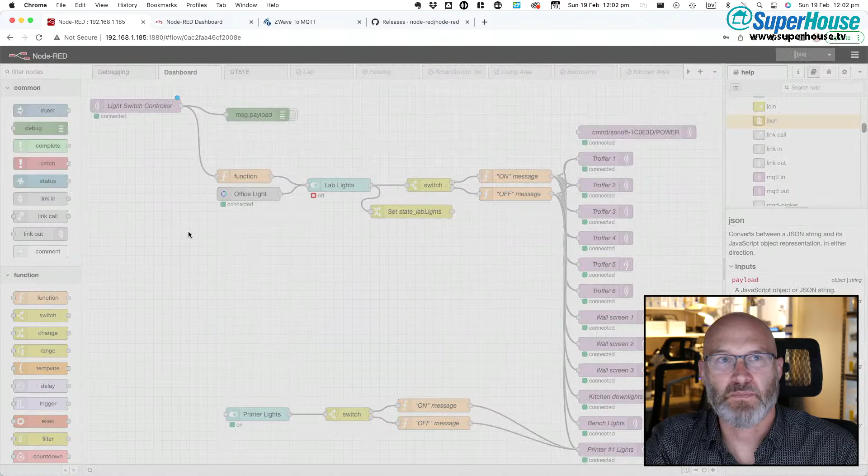Groovy. So now if I click on deploy, and I walk over - not going to worry about that for now. I'm going to switch back to this view, walk over to the light switch, and press the switch, and we'll see if it still works.

And it works, look at that. I can turn the lights on and off using the switch, and we no longer need the conversion. That is nice.

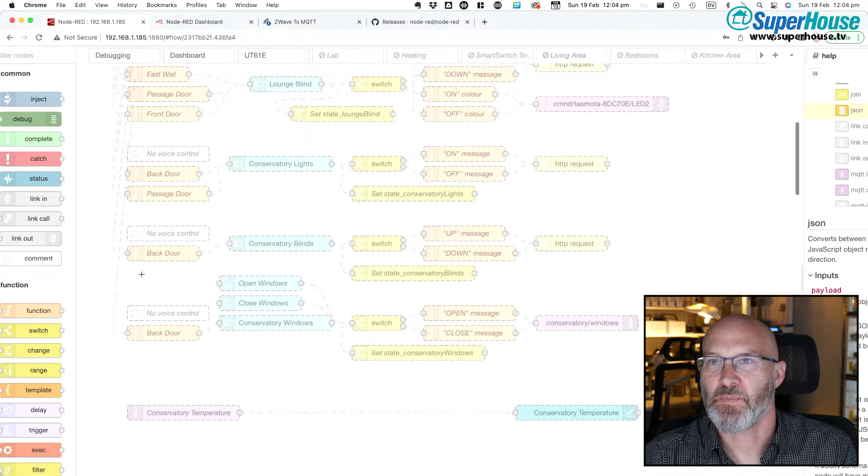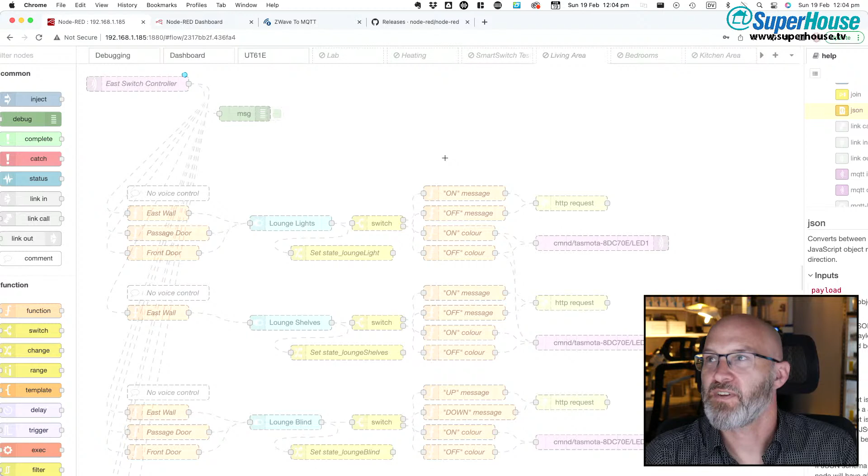And doing it the old way, I would have had to re-establish all of those links. But now I can just select that, go control-delete, and boom, all those links are still in place, which is fantastic. I'm just going to hit deploy again so it stays, so it's saved.

Very, very nice. Less clutter. Yes, you're right, Scott, less clutter. Well, that in itself is a good enough reason to go to Node-RED 3. Right.

Oh, so Aaron said double-click a node in the group to edit and move them. Yes, that's right, I read that comment earlier and then I didn't follow up with testing it. So I'm going to try this. I'm going to select these and then I'm going to group the selection.

And then if I click on hot air just once and move it, it moves the whole group. But if I double-click on it, it moves it within the group. Oh, this is perfect, that's exactly what I wanted. Now if I click away from it and click on it, it moves the whole group. Very nice, okay, you just have to know.

So Scott says, now to blow your mind, you can select a link and insert a link out, link in pair.

Okay, yes, I think, hang on, I'm going to ungroup. No, I'm going to move these back down here and then I'm going to ungroup the selection. Now, yeah, I think I'd heard about this one.

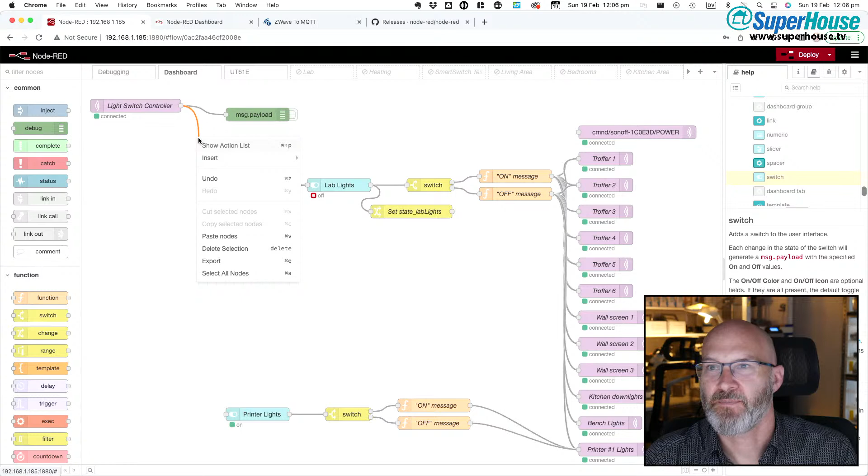So is this where you want to insert a node into an existing link? Let's see, select the node, right click, and where are we? Okay, you can select a link and insert a link out, link in pair. What do you mean by a link out, link in pair? Is that where you put a node in the middle?

So it's the opposite of the event that we just did. I'm just going to stick a function node - I'm going to try sticking a function node into there. Oh yes, it does. How slick is that?

All right, so now I'm going to command-Z that just to undo that. Oh, right-click insert, okay.

Oh, Don S from New Zealand - hi, I'm late, I'm doing an install in the USA. Hang on, are you physically in the USA or are you in New Zealand doing a remote install?

So, okay, so I've got this link. If I right click it, insert node, junction or link nodes. What happens if I just insert a junction? All right, so from a junction, I can link something else, I guess. If I do insert node - oh okay, it just lets you select from one of these.

If you do insert link nodes, that's a way of neatening things up. What happens is it's like a hidden wire - there's a link out from here and a link in here, but it doesn't have the link cluttering everything up. If you select it, it shows a representation of that logical connection. Nice.

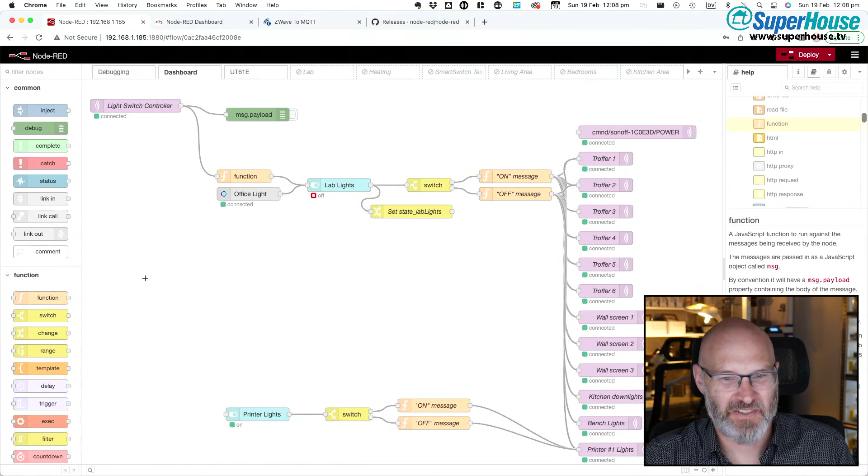Don says, flew to Chicago, then drove to a large chocolate factory in Pennsylvania. So right now you're in a chocolate factory in Pennsylvania. Should we all be jealous? Or maybe not, because you're not eating chocolate, you'll just be smelling it - chocolate factories smell amazing.

Aaron says the group will auto resize if you drag a node outside the existing ones too. Let's do that as a test. So we've got group selection, and now I'm going to move this up here - you can see the size of the border. Now if I double click hot air and drag it down here, look, the border expands to keep a bounding box on it. Nice.

Don said, can't say who, but you can probably guess.

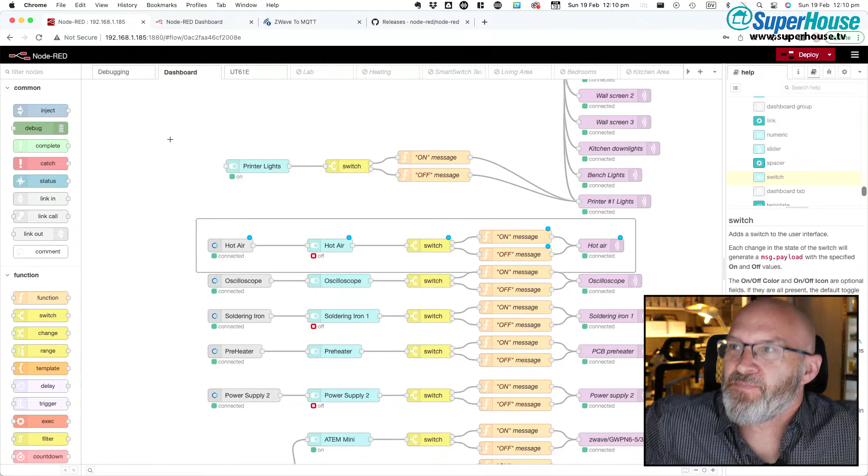David says you can link between different flows - is that the virtual link function, like hyperspace, or teleporting between different flows? The way I've been doing links between nodes is using global variables - that's what I've been forced to do in some situations. Set a global variable in one flow and have that variable processed by something in a different flow - that's how I've got around doing links between flows in the past. But if you can have links pass directly between flows, that would be very handy.

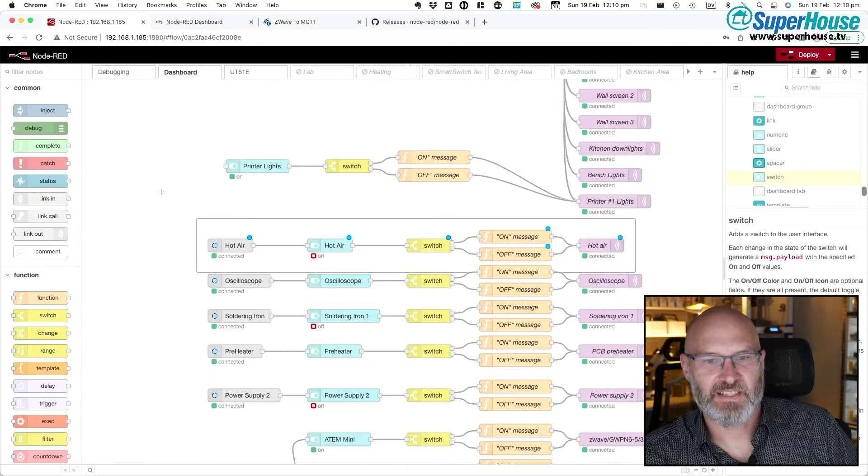Stephen W. says it is indeed 10 past pizza, and I feel I must stop. I must let everybody else get on with their lives.

At some point, maybe when I've done a bit of preparation and got everything on the bench, I want to get an MCP23017 on the bench here and show it to you failing, or we'll try it and see if we can get it to fail.

Michael says he'd need to put the pizza in the air fryer before asking Alexa to start it. OpenWRT, yes, we should do that - lab construction, oven, ChatGPT, programming and board design. Okay, so we've got some topics to follow up on for future live streams. Lots of awesome stuff coming up, says Imogen. 10 past 1am here in the UK. Zigbee to MQTT, yes, that's correct. Aaron says you can hide tabs as well to tidy things up, just right click. Nice, yes Peter, you're right, Zigbee to MQTT. I really need to get back to making videos, I so need to do it. Austin says, and soon mail time - that's right, I'm going to have a package from Austin with the PoE source auto selection circuit running, so that'll be awesome as well. It's going to be some fun stuff coming up.